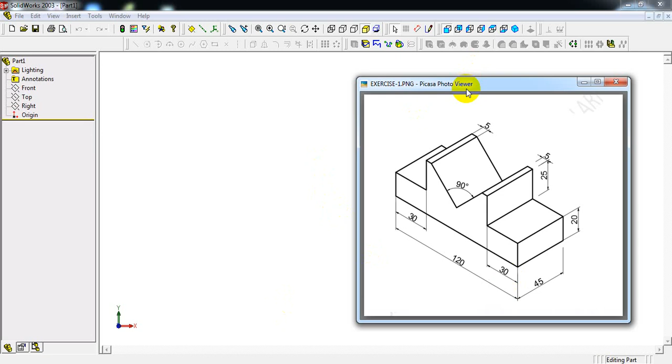So first we have to draw one rectangular block. Then we have to cut this one and this one.

Select sketch. Select rectangle command. Draw one rectangle.

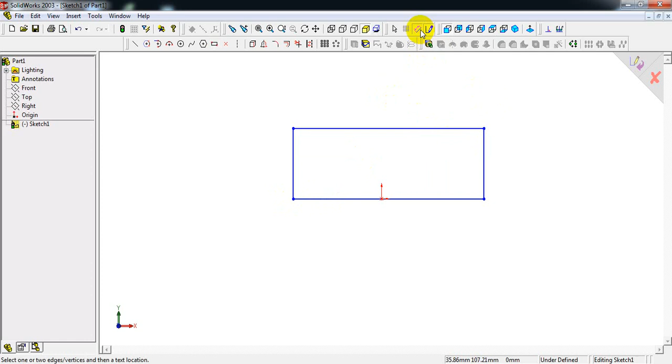Select dimension. Length is 120 mm, so do the dimension. Length as 120 mm. Next height is 20 plus 25 mm. Select this vertical line and make dimension as 20 plus 25, so it is 45 mm.

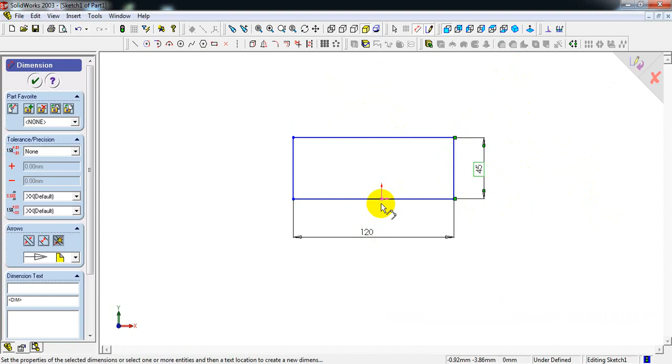So if you want to make it center, select origin point, select one edge, and make it as 120 divided by 2. So now it is exactly in center.

Now select isometric view. In the sketch as given, width is 45 mm, so we have to extrude it.

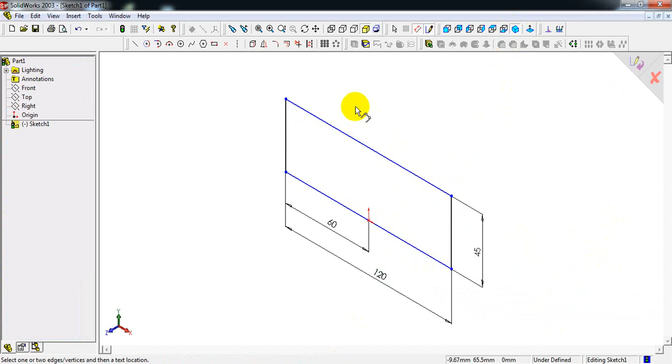We have to take extruded boss base command and here enter 45 mm. Enter 45 and select OK. So this is our rectangular block.

See, this is the diagram. We have to obtain this isometric block. So...

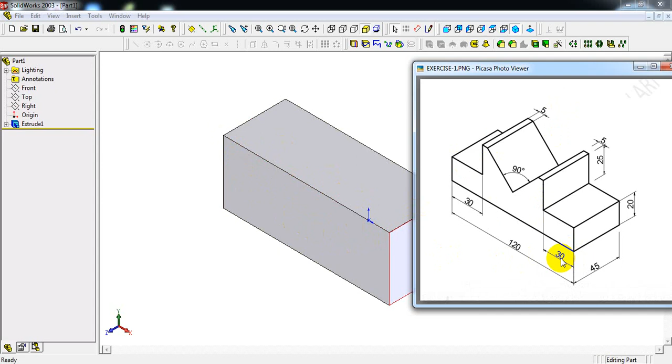Here we have to draw one rectangle, and from this corner we have to draw one rectangle. Make dimensions as 30 and 25, 30 into 25. Select front face.

See, this is the front face, this is the top face, and this is the right face. Now select the front face followed by front view.

Again repeat the process. Select sketch, take rectangle command. From top left corner draw one rectangle. From top right corner draw one rectangle.

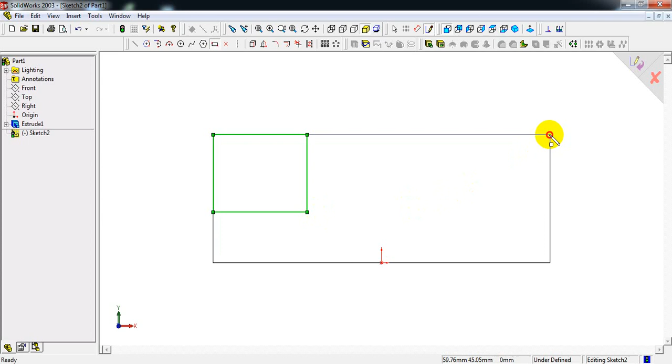Make dimension. See here, length is 30, height is 25. So length, enter as 30 mm. Height, make it as 25 mm.

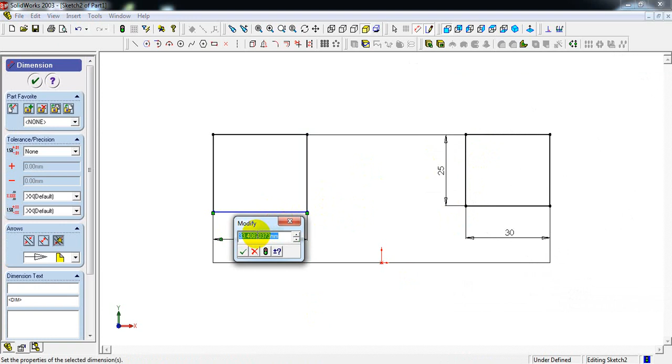Again here same dimensions, 30 into height will be 25. So 30 mm, height is 25 mm.

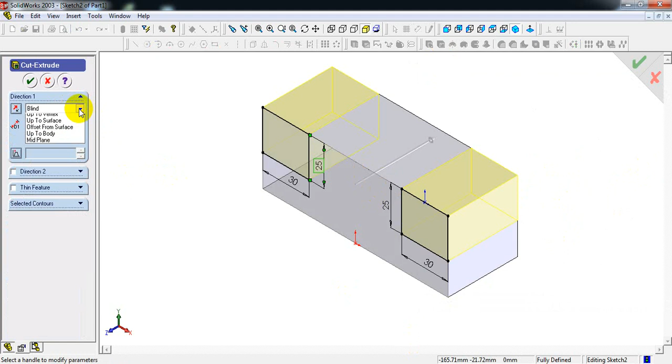Now select isometric view. Extruded cut, so we have to cut entire length of this part. So see here, it is cut through all. So here also, select in place of blind, select through all, and select OK.

Now we have to cut this portion. It is V shaped and it is 90 degrees here specified, 90 degrees, and it is at a distance of 5 mm.

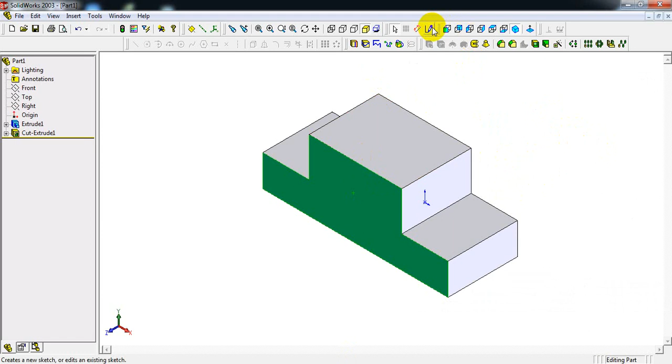Again select front face, front view, sketch, take line command. See, in line command, if we are starting from this point, so ending should be this point only.

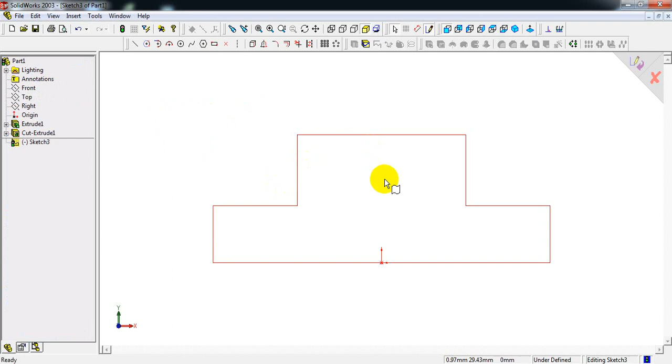Starting must be the ending point. Starting should be always ending point in SolidWorks, because if the sketch is open, the extruded boss base or extruded cut command will not work and not execute.

Select line command. So from here to here it is 5 mm.

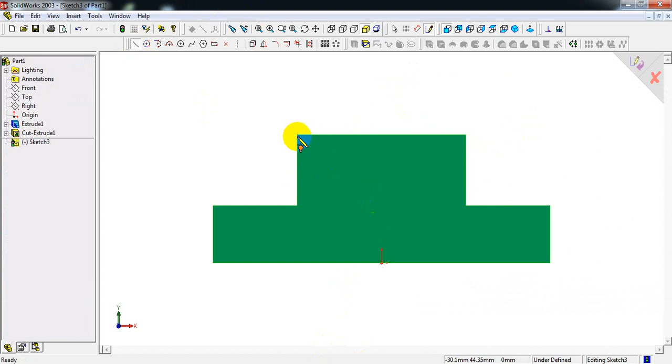Don't start from the edge, leave some gap and start drawing the sketch. Draw one inclined line, one more inclined line, and one horizontal line. Okay, this is the starting point and this is the end point.

Now make dimension from this point to this edge. See, this point to this edge, take it as 5 mm, and from this point to this corner, this edge, take it as 5 mm.

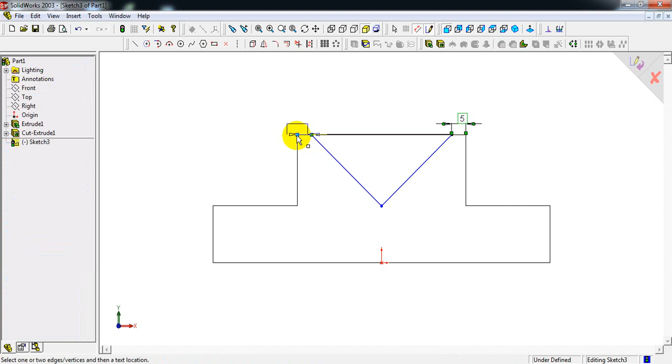In this sketch it has given as 5 mm. Next, here we have to obtain 90 degrees. In order to obtain the 90 degrees...

Its edge should be 20 mm, and from this edge to this point it should be 60. Now measure the angle. It is 90 degrees.

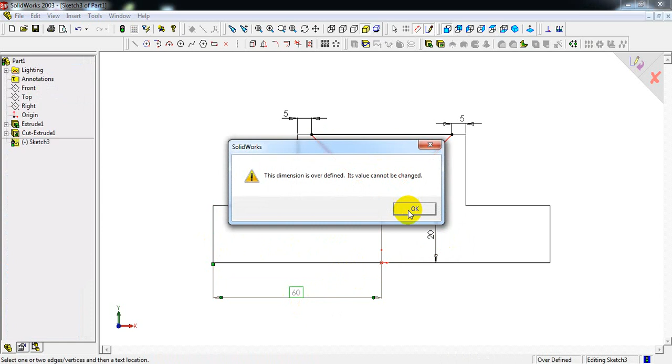It is 90 degrees. Now select isometric view, extruded cut. So here this shape is cut throughout the block. So select through all, or we can give it as 45 mm. Select. So this is our first model.

So how to do dimensioning for this block? So he has given some dimensions here. So do the dimension as per the...

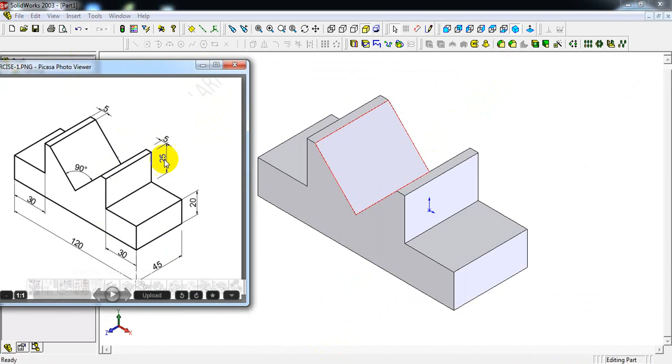Select dimension. Select this edge and this edge, it is 120 mm. Again select this edge and this edge, 45. Next select this edge, it is 5 and 5.

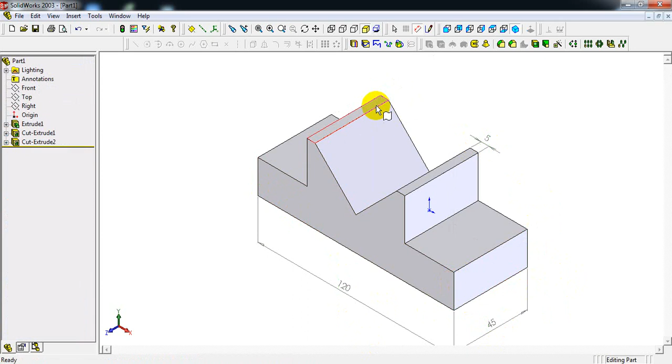This line or this line, okay, it is 5. Next angle is 90 degrees. Okay, it is 90 degrees.

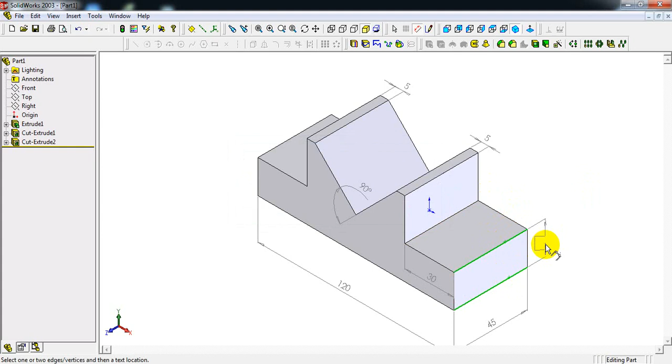Next this is 30 mm. Next height is 20 mm. Here it is 25 mm. Okay, or else take it as overall height, it is 45 mm. Okay, these are all the dimensions.

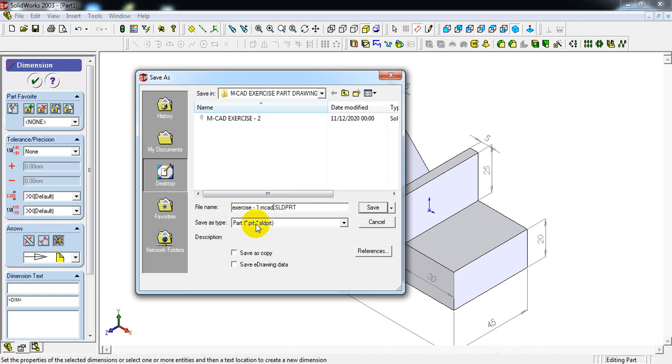Go to file, save, name it as your convenient. Okay, I am giving it as exercise 1. So I have named it as exercise 1. Save.

Next, in the question he has given, create front, top and side view for the given isometric part. So this is the isometric object. We have to obtain front, top and side view.

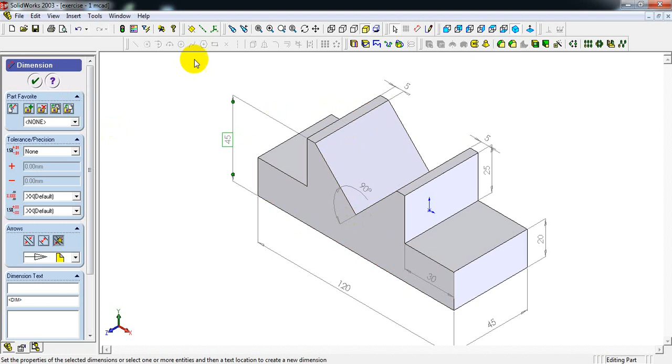So first we have to save the file, save this part. Next go to file, new, here select drawing and select OK. So this window is displayed.

Observe carefully. Select no sheet format. Here select the paper size. Make it as A4 landscape and select OK.

So now go for predefined view. You can see the icon here. Select predefined view and place it, drop it on the bottom right corner. Drop it on the bottom right corner, and here it should be isometric view.

So select isometric, browse the part which we have to use. I have selected this part, select open, make it as and select OK.

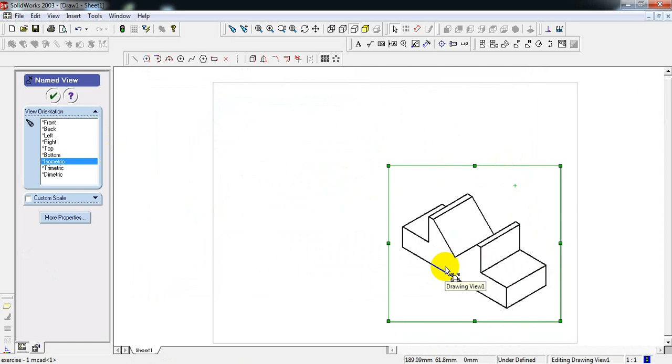So for this part we have to draw front, top and side views. So how to obtain them?

Here select beside of predefined view, you will find standard 3 views. Select this. Within this box, we have to click within this box, not on the object but inside this box. Click on it and select OK.

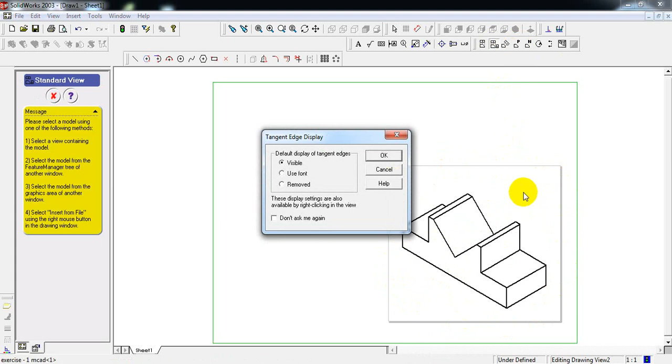So this object front view looks like this, top view is like this, and side view is like this. Now we have to do the dimensioning for this.

So instead of doing it individually, we have one command here. Go to insert model items and select OK. Insert model items and OK.

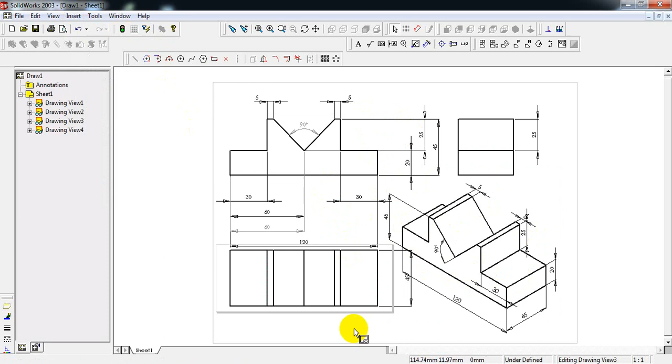So what are the dimensions we have given during the projection of this isometric part? Everything has been displayed here. So whichever is not required and whichever has been repeated twice, you can click on that and you can directly delete it.

Arrange it properly. So everything should be displayed within this boundary line. So this is our A4 landscape sheet.

297 comma 210. So next, select note, click here. This is our front view, so name it as front view. So do it in caps lock.

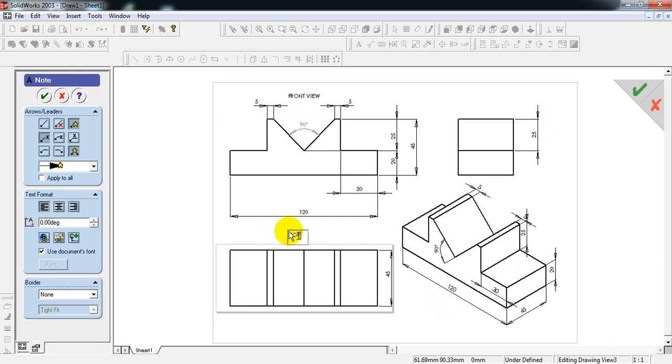Front view. Next, this is our top view, and this is the side view. This is the isometric view.

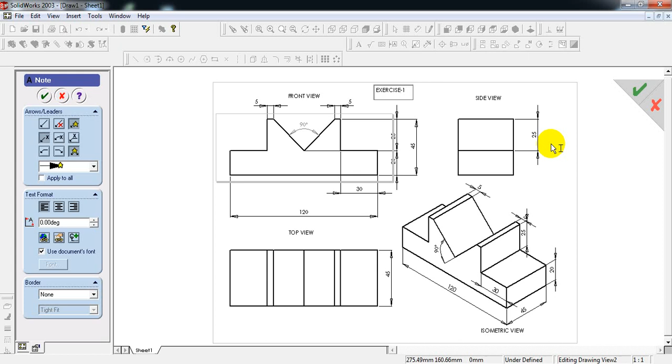Okay, and this is exercise 1, so I am giving title as exercise 1. So this completes your first exercise.

So first we have to draw a part of isometric object or isometric machine part, then we have to obtain the 3 views. So after this, save the file, give it as exercise 1. Okay, now save.